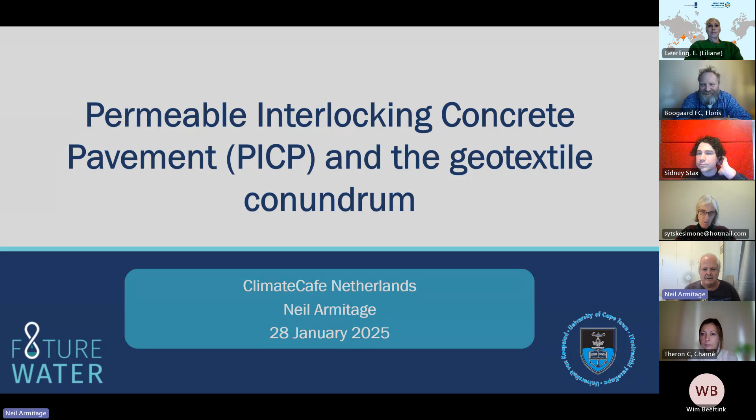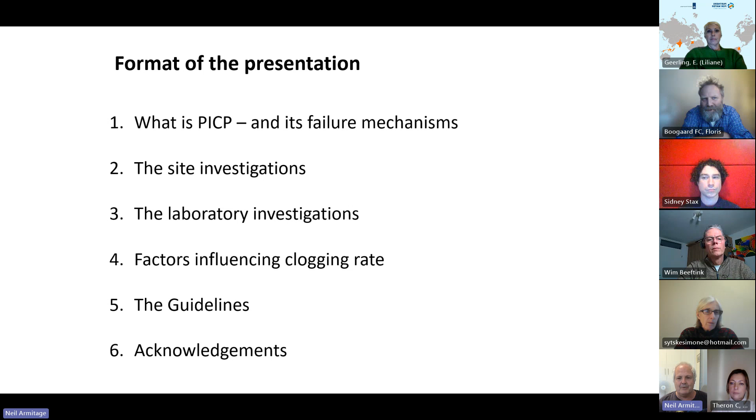So the format of the presentation: I'm going to chat very briefly about PICP and its failure mechanisms - you probably all know this already, so I probably don't need to dwell on it a lot. But what I want to talk about is some of the site investigations and laboratory investigations we did to try to address the big problem we have in South Africa as to why PICP is not working. I regard it as something of an embarrassing failure, something that is threatening to drag down sustainable drainage systems in general. In the end, I decided that if I couldn't stop it, I better figure out how to do it better. So I'll talk about what we found out in terms of the clogging rate - PICP fails by blockage. Then right at the end, I'll talk about the guidelines we put together, which are freely available from a link that I'm sure will be provided to you.

Maybe Neil, do you want questions afterward, or can people break in? What do you prefer? Given the size, given the fact that it's a very small group, I'm quite happy for you to chip in and ask questions as we go along - it's not such a big deal whether I finish all in one go.

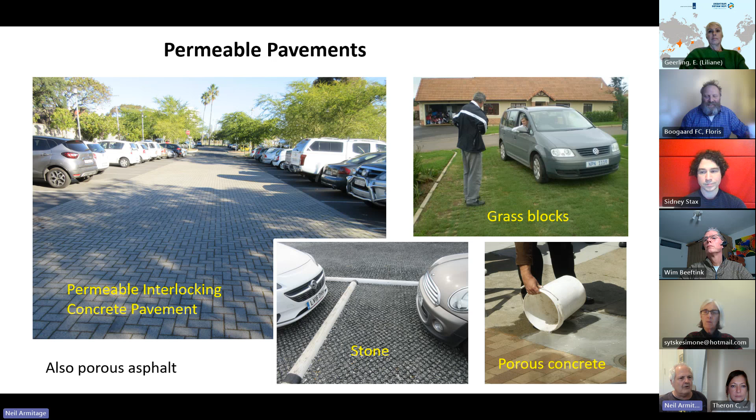So anyway, this is an introductory slide. Permeable pavements, as you know, come in many shapes and sizes. You get some very nice stone pavements like the bottom one, which is actually from the UK. Porous concrete - that was actually in San Francisco, in fact, a while back. Grass blocks, and then the permeable interlocking concrete pavement on the left-hand side. Just in passing, that was pretty much the view out of my office window when it was completed. Of course, I don't have that office anymore because I'm not head of department anymore, and I only go onto campus when I need to. But that was what it looked like shortly after it was completed, a fairly typical permeable interlocking concrete.

I'm not sure if it's in this presentation, but I know Ryan Winston from the US has a wonderful picture of a fire engine splashing water on permeable pavement, brand new. And the moral of the story is that you shouldn't ever be able to pond it.

It should always just disappear. And along the way, it does quite a reasonable job of taking out a lot of the solids in the stormwater. It does a less good job about taking out things like nutrients, although another study that I did, and if you want to hear that, I'm happy to come back.

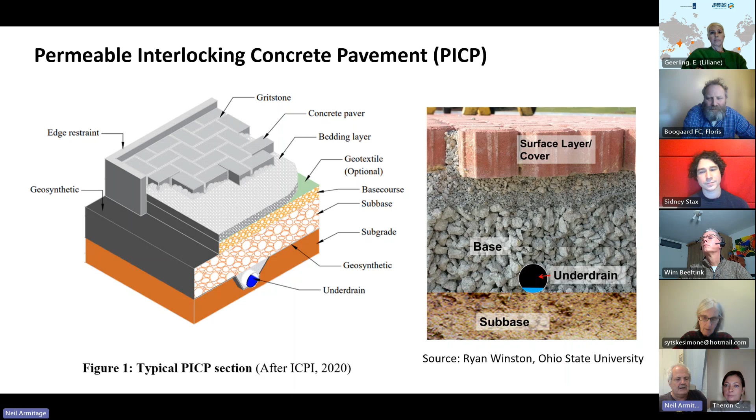So mostly it sieves out the solids, and the solids, of course, contain a lot of heavy metals and even some nutrients as well. And its main role actually is to reduce immediate runoff and either feed the groundwater or trickle feed back into the stormwater system. And pavers come in many shapes and sizes.

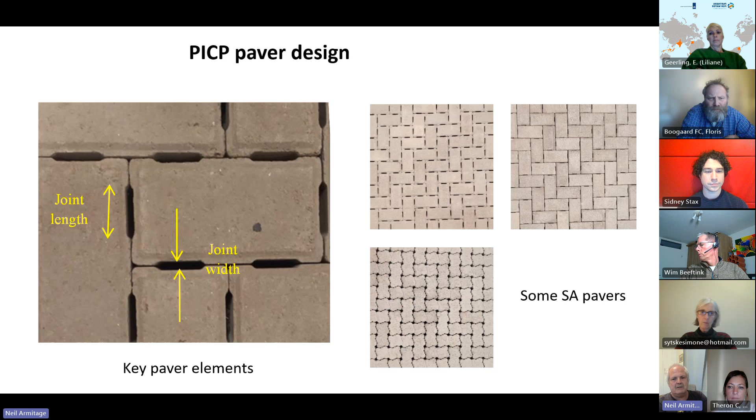And in our later research, we worked quite a lot with opening area as a way of understanding performance. In other words, do larger openings make for better performance, essentially?

So it was quite annoying. They put this thing down, and the next thing they did is they came along with a whole lot of marquees and hammered nails into the brand new bricks, which goes to show that, well, some people don't care. So that's been around for a while.

And here is some more under construction. This is in Joburg, in Johannesburg. You can see the different pavers there. And here's another one, back in Cape Town, showing some rudimentary maintenance. I'm going to talk a little bit about maintenance as well.

But let's move on. So the problem comes right here. I've been trying to promote sustainable drainage systems in South Africa since about 2007, 2008 or so. I got funding from the Water Research Commission to basically write guidelines for an alternative way of doing stormwater.

That would be more environmentally friendly. I had lots of friends around the world who were into this in a big way, so I could lean on them. And we produced guidelines, but PICP was one of 12 different main approaches identified by actually one of my students. He used to call them the 12 apostles. And PICP, or permeable pavements, was one of them.

And at the time, I thought, yeah, well, that's nice, but it would be totally useless in South Africa. You can see how it would fail very quickly. Maybe just to mention why that is the case. And that is simply because if you've been to South Africa, particularly at this time of the year.

Today was over 30 degrees. It was as dry as a bone. We've had a howling gale going for the last couple of days. It's hot, dry, dusty, and throw in poorer construction, no maintenance. You can understand why PICP would fail in droves, and it does.

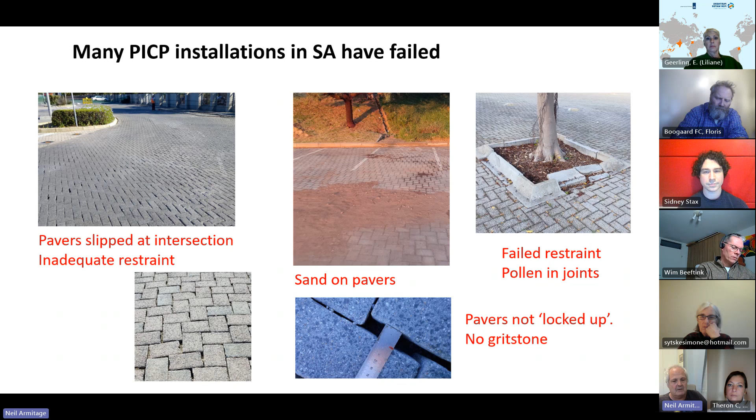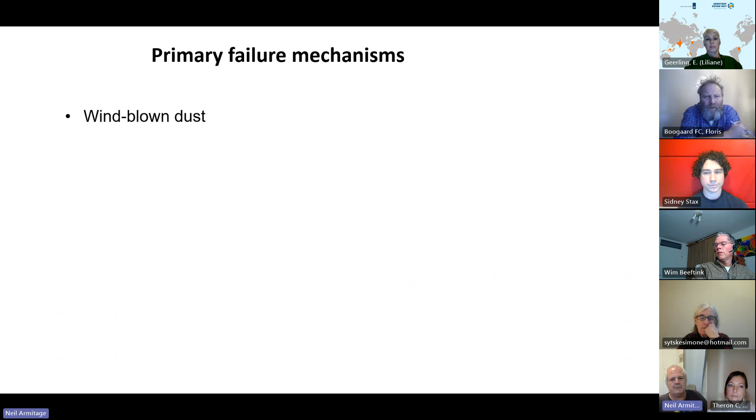So what were the primary failure mechanisms that we identified? Well, most of them are obvious - I would have thought every engineer would have thought of this without even a blink. It was the wind-blown dust, the high run-on.

Some of these sites connect large areas to them, making sure that all the sand and muck from the surrounding areas - and South Africa can get very mucky, let me tell you - we have informal settlements, we have poor refuse collection, we have everything.

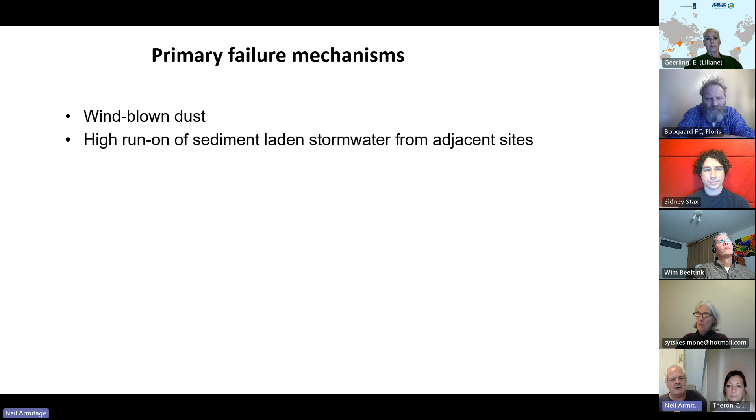High run-on of sediment-laden stormwater, poor construction practices - the joint filling material is supposed to be a 2 to 3 millimeter grit, but some people were putting builder's sand in here and wondering why the thing had failed on day one.

There were dirty aggregates - in some places they had put stone in there when it's supposed to be a single size aggregate. They had put aggregate, but it was like a concrete mix - it had everything in it, there was no single sizing at all, there was dirt in it, inadequate edge restraints, et al.

Differential settlement was something we saw on many occasions, and you see that when the whole surface starts to wave because of vehicle loadings.

Unsuitable environmental conditions - these things were put under trees or next to planters. One very common issue in South Africa is that its climate is very similar to Australia's, so Australian vegetation grows very well there - in fact, Australian vegetation grows better in South Africa than South African vegetation, and the reason for that is quite simple: the natural controls have been removed.

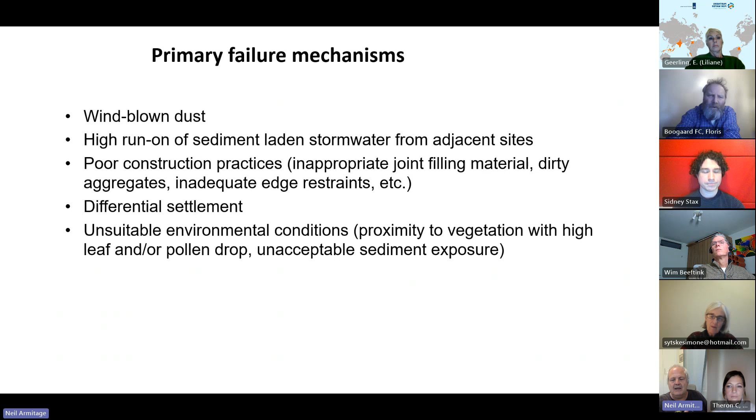It works in reverse too - South African vegetation grows better in Australia than Australian vegetation, because the natural controls have been removed. So we have these big eucalypt trees, they grow massive, 20, 30 meters high, dropping fine pollen onto the pavers and plugging the gaps.

Lack of maintenance - well, very few sites are maintained at all. When we did our survey, there was zero maintenance in Johannesburg - it might have changed now, but I wouldn't hold my breath. In Cape Town, we knew of only one site really that was being maintained regularly and was actually making out okay because of it.

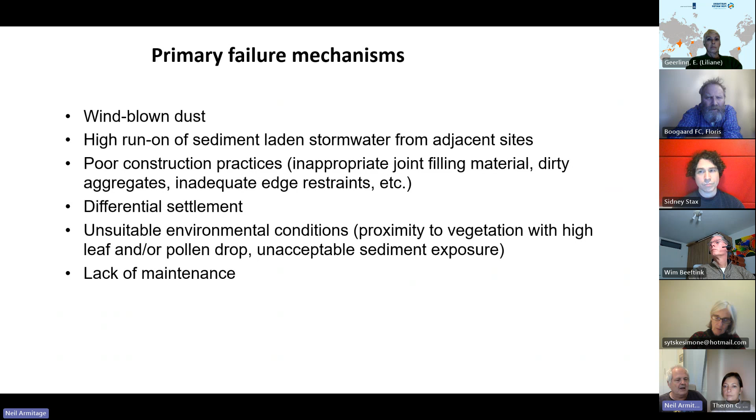Part is because of a culture of lack of maintenance, part is because we don't have the equipment. I went to the US on an interesting tour, spent time with Bill Hunt at NC State, and then at the LID Operations and Maintenance Conference where they had demos of fancy machinery for PICP maintenance. Of course we're not going to get that in a country like South Africa, you're going to have to look to something else. So I get it's difficult, but it's not impossible.

One concludes that in South Africa, at any rate, although it was interesting chatting to people around the world doing PICP research, there's a lot of disagreement but essentially poor understanding of PICP design, construction, and maintenance. We needed to do better. My tactic in the end was to get funding to do a proper investigation and come up not only with a report of why things were failing, but guidelines to stop the rot, to try and guide consultants and municipal managers and contractors to do a better job.

Maybe one question, Neil, because you talk about maintenance. Was there only one site, or several sites in Cape Town? You don't have the machinery - what do you mean with maintenance? What kind of maintenance did they do? Was that sweeping, or was it more?

What action? There's many ways you can do maintenance, but sweeping, if you're not careful, actually makes matters worse because you simply sweep dust into the cracks. In theory, vacuuming the stuff out of the cracks should work, but it doesn't, for various reasons. I've seen American equipment that claims to do it, but I've seen research that says it doesn't do a particularly good job.

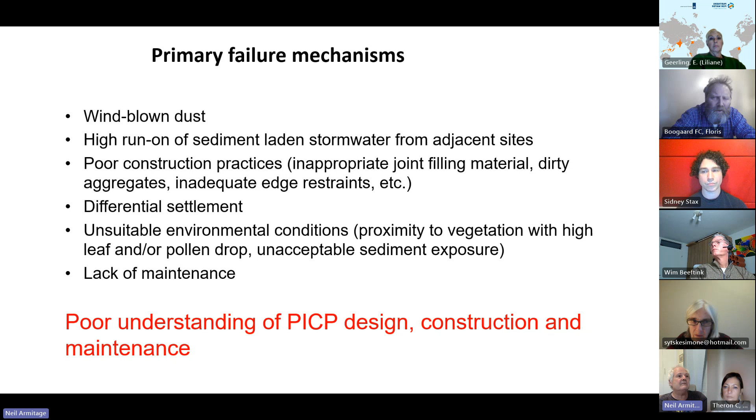Maybe I can go back to that very quickly. Let me see - oh no, there it is. That one. So you can see this is the one site that is being maintained and holding up quite well. It's just down the road from me, a shopping center. And what you can see there is a chap blowing compressed air into the gaps.

Now, of course, South Africa has a massive unemployment issue, between 30 and 40% unemployment, which means people will work for unbelievably low wages, something that would be regarded as slavery in the Netherlands. Nevertheless, it's a job for people. So this maintenance crew was put together from unemployed young adults in Cape Town, and essentially it's a compressor with a wand directing a jet of air between the joints, going around each and every brick individually. It's impressive stuff from the perspective of a rich country - that's why the Americans have fancy machinery, but we have people.

So we do that, and you can see from that slide, he blows the crud out of the top 25 millimeters onto the surface - you can see it just beyond him. Then someone comes and sweeps it up, hopefully not too much of it falls back in the gap. They do that on a 3-yearly cycle.

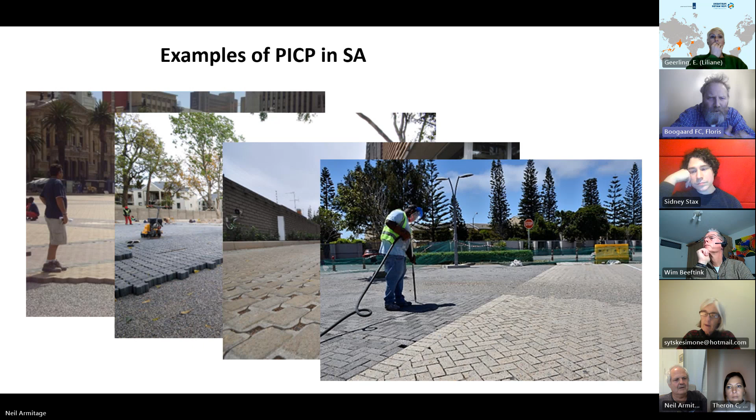But yeah, we haven't got there on this particular site. We will shortly. No, it's good to be clear what kind of maintenance - we know because you didn't have the equipment, but yeah, this is clear, blowing with wind, with air, perfect. The other things, we just don't have the equipment, but fortunately we've got people.

So the research culmination was these two years that went into producing this report on clogging failure in South Africa, plus the guidelines.

We did extensive literature review, as we always do, of course. We collected data from 11 existing sites, and I'll show you a bit about that. I had a brilliant student who was in charge of this, and he did things that most normal people would not contemplate in their worst nightmares.

Laboratory investigations we did as well, to try and get a feeling, in a controlled environment, what's going on. And then this working group - I basically threw it open to anyone in South Africa who had an opinion or wanted to have an opinion.

So I got municipal engineers, I got consultants, I got suppliers, both of the pavers - we couldn't get the stone in the end, but other people spoke up for them. Everybody who said, I'm an expert in this, or I want to be an expert in this.

I said, come and join. As you can note from the dates, it was during COVID, and it turned out to be a brilliant thing to do in COVID, because we were all sitting on Zoom anyway. So we could do it from wherever we were - it was across the country.

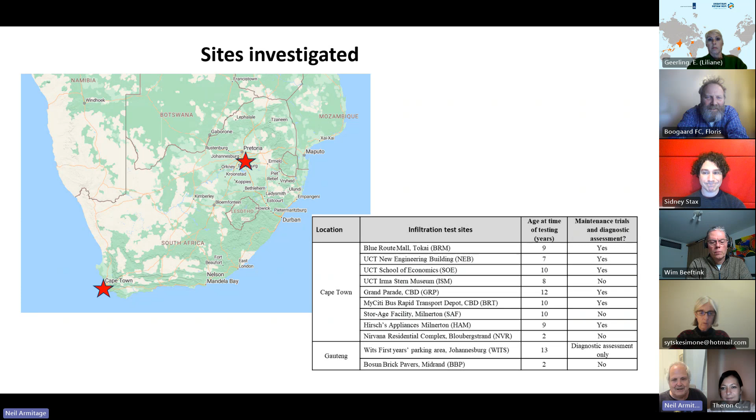And you'll see the maintenance trial and diagnostic assessment. What we particularly wanted was diagnostic assessment, because that means digging it up. And of course, not too many owners of PICP were happy for us to go and dig up their paving. 'Shopping centre, let's just dig up the middle of your shopping centre - you don't mind, do you?' 'No, of course, go ahead.'

All right, so how do we test it? We used a modified ASTM single ring infiltrometer. On the left-hand side is how you see it in the textbooks - we had one of those. It was really awful, because trying to get that putty in doesn't do a particularly good job, and you can't get the markings off. So I decided, no, we're going to reinvent this.

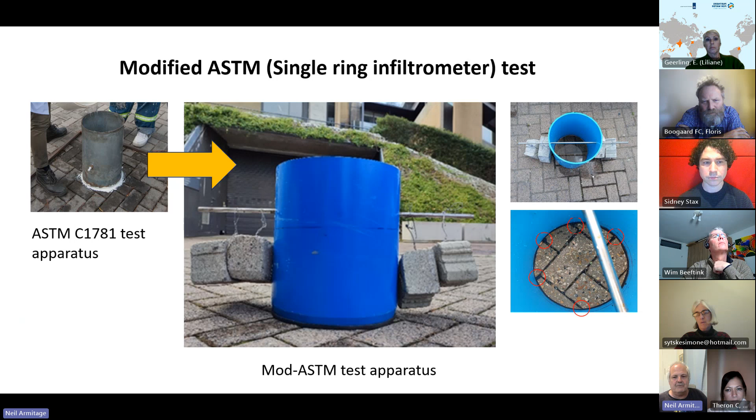So we got a 315 UPVC pipe, we chopped a length off it, we put a neoprene pad at the bottom and a couple of weights to hold it down, and tried to plug the corners as best we could with some neoprene strips. And we did a lot of tests - we've been doing the test for some years now to try and get some sort of calibration.

And we measured the infiltration rate, but we also did a modified Swift test. This was developed in Australia and is a quick and easy way of determining how blocked your PICP is, by basically looking at the area wetted when you drop 6 liters on it.

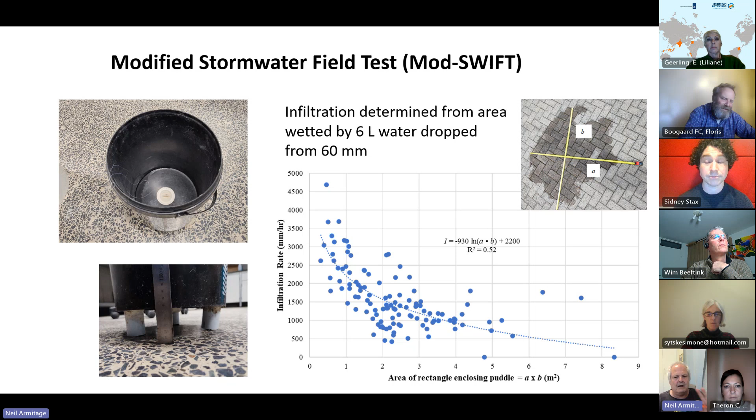But I'm not going to talk about that much, other than to say that we did this as well. So what I want to really do is show you what we were doing now.

This site on the top left-hand side is actually the Grand Parade in Cape Town. It's the oldest site in Cape Town, completed in 2009, just ahead of the World Cup. You can see the test spots; we looked at various spots trying to find a range.

On the left, the green was used extensively for what they call hawkers' stalls. Poor people set up their tables and sell cooked chickens and chips and things, very greasy stuff. In other words, grease, not very friendly to PICP.

And then there were other areas that were different. You can see the kind of results we were getting on the left-hand side. This is the surface infiltration rates.

You can actually see, to all intents and purposes, they were all blocked. Now don't be misled, just because it says it's 30 millimeters per hour doesn't mean it's really 30 millimeters per hour, because it's almost impossible to stop leakage out the side. In fact, once you get below about 250 millimeters per hour, you're really in clogged territory. So this is clogged - you can see that's all clogged, not working.

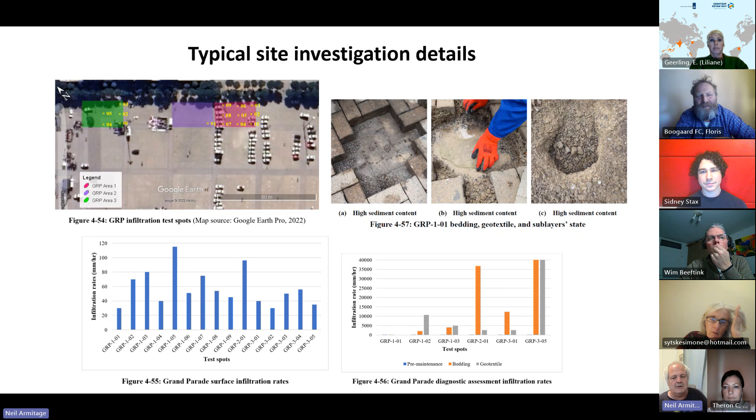Anyway, we did lots of these tests all over South Africa - surface tests, down onto the geotextile underneath, on the bedding layer, under the bedding layer, through the bedding layer, all the way down. We found there are 4 quite clearly defined failure mechanisms, or maybe 3, because type 3 requires you to have a geotextile. If you have a geotextile, there are 4 quite clearly defined failure mechanisms.

There's the muck in the gap. There's the muck at the bottom of the joints. There's a textile failure because of the mud being ground into it. And then, very rarely, there's total failure of the aggregate.

Of course, if you don't have a geotextile, then in theory you can eventually get like that over a long period of time. But I don't think it would happen - it'd have to be a very long period of time, I imagine, to get like that. So that's really a construction failure.

So I define these as type 1, type 2, type 3, and type 4, because it helps you understand what the mechanisms are and therefore what you need to do about it.

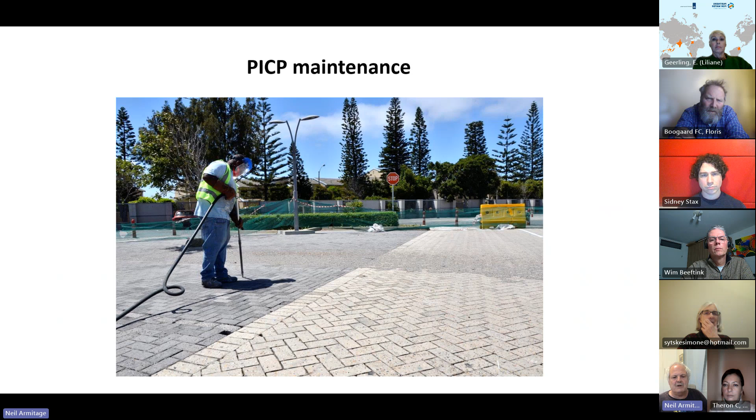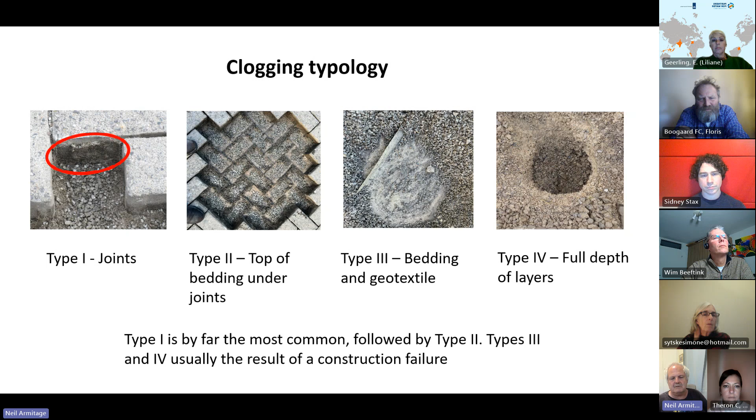And then we talked about the maintenance, and the maintenance is really designed to clean up type 1. It does so partially, but at the expense of moving some of the material into ultimately a type 2 failure. And when you get that type 2 failure, or even type 3, you eventually get to a point where the only way out is to lift the bricks, peel off the bedding stone with its geotextile, and then put in fresh material. This is reconstruction - type 4 is reconstruction all the way through.

So maintenance, that's what's happening on site. But meantime, we've got parallel investigations in the laboratory, 4 PICP test cells to look at, and we had a whole lot of questions.

It was about the geotextiles. Ryan says never use geotextiles. Sue says always use geotextiles. The Australians couldn't make up their mind, eventually settled on never use geotextiles. So what is the link between different types of geotextiles and clogging? Sue is saying you must use Fibertex. The locals are saying it's too expensive. Can we use an alternative? Why can't we just use a non-woven needle punch cheap stuff? Won't it do the same job? No one knows. Okay, so let's try.

The link between paver opening and clogging, because different designs have different paver openings, using the same geotextile, changing one thing at a time. The link between different geotextiles and clogging without the pavers installed. Maybe it's not about the pavers.

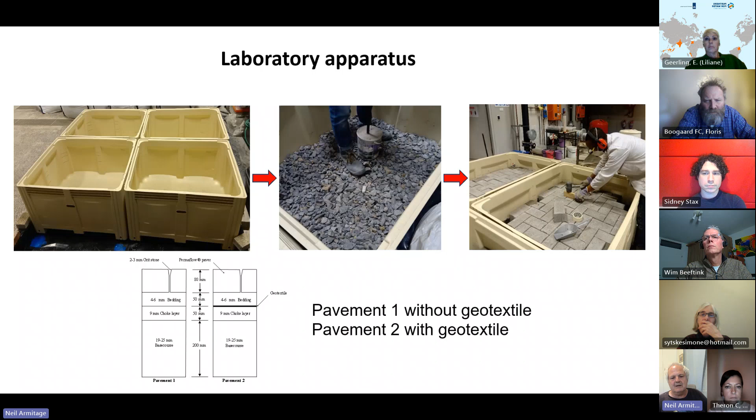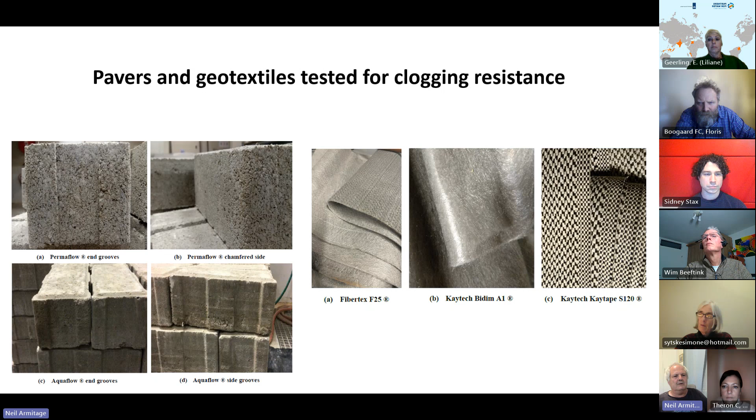Here's our experimental apparatus. You can see these bins, these jumbo bins. We had some holes drilled in the bottom, and we constructed typical PICP sections in them, with and without geotextiles. You can see we try to replicate in the laboratory what we had in the field. Then we looked at different types of paving design and three different types of geotextiles to represent woven, punched, non-woven, heat sealed non-woven, needle punched, and woven, basically. We tried lots of combinations.

Because of the size, we looked deliberately. In fact, we took from site initially sediment that we took from the maintenance - they cleaned out a site. This is the stuff that clogged, right? So I'm not going to worry about the stuff that doesn't clog, this is the stuff that clogged. We put it through some sieves, sprinkled it all over as best as we could, and then we applied rainfall measured with a watering can, no fancy watering device. This is far more accurate, and you know what? I'm convinced it does a better job.

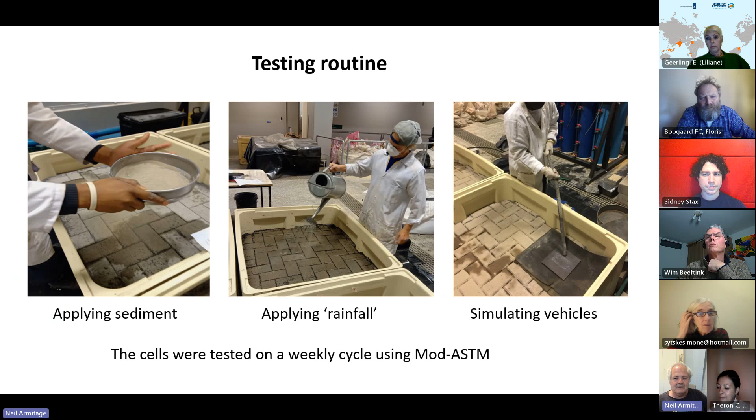And we even tried to simulate vehicles. That was a bit awkward because obviously we can't get a rolling vehicle on this. Sue did offer their very sophisticated full-scale dynamic test platform in the UK - I hesitate at what expense, but anyway, we didn't take her up.

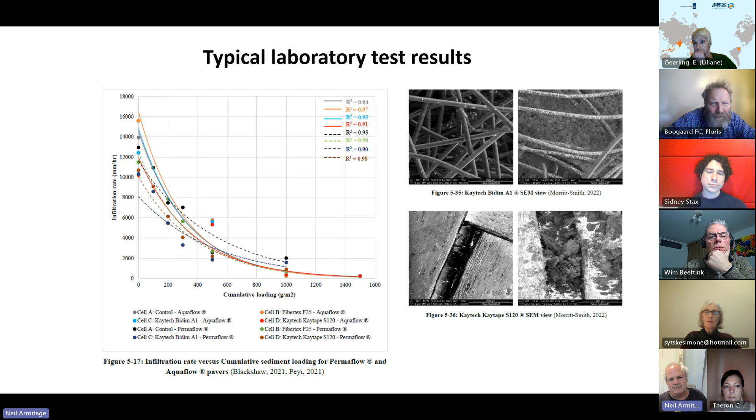That's a question to us, right? As scientists, what do you think? Well, the lines go down, but lines will go down. And they go down in some sort of curve, yes. And where do they end up? Zero, almost zero, all at the same point. You can see that actually it doesn't seem to matter, all the different combinations. Yes, you can start off with much higher flow rates - over 16,000 millimeters per hour, if you can actually measure that, down to 8,000 millimeters per hour. These are all brand new, just completed, constructed, whatever. They all decay at slightly different rates, but it isn't long before they're pretty much all converged.

So what we did find - what are the factors ultimately affecting clogging rate? This is a combination now of laboratory and site, loads of experiments on site, loads in the laboratory, loads of pondering. Obviously age of pavement is an issue, but it has links to environment, installation, and maintenance. What we found, which rather surprised us and we got a lot of blowback from this, age doesn't correlate particularly well with blockage. A well-designed, well-maintained pavement can last decades. A poorly maintained, poorly designed pavement can fail in minutes. Age is not a particularly good predictor of clogging.

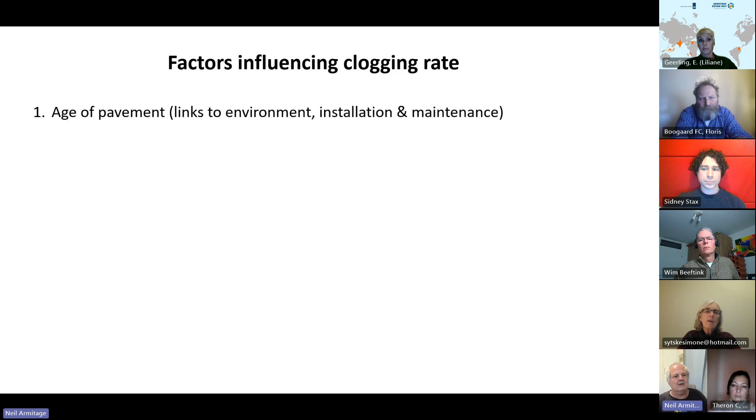Run-on factor - now this was a big thing around Winston. He's got a paper on this, and he spent a lot of time going around the world saying how the bigger the run-on factor, the faster you fail because it brings muck onto your pavement. Does it make a difference? Yeah, I guess so, but you know what? It isn't a big correlation either. So think about it, but don't lose too much sleep. Pavement type - well, the larger joints do better, and they do better simply because they can store more muck until they clog. That's why they do better. It's not rocket science we're talking about here.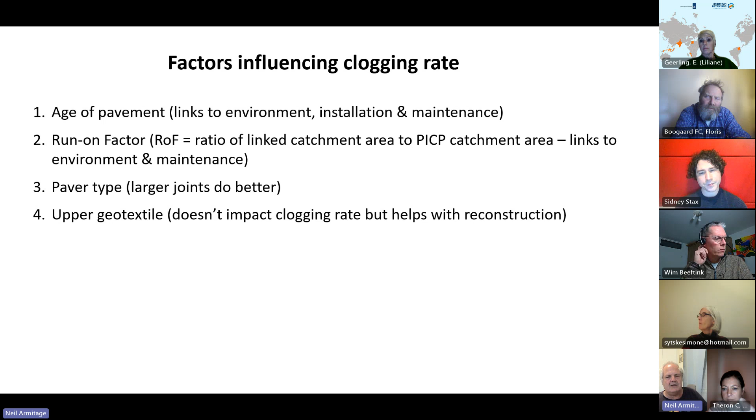Now we come into the zone, that upper geotextile under the paving layer. Americans are adamant it's a bad thing. What we discovered, and I think we did it fairly thoroughly, is that actually it's not a problem - because the clogging happens generally higher up. So it's not in the geotextile, it's in the joints, or it's on the bedding layer. And when we saw a geotextile failure, it was always associated with movement of the bricks over the bedding. If you let your pavers slide, like at that turning circle, you are going to have a geotextile failure. But it is not because the geotextile is inherently a bad thing - it's because you haven't constructed the thing properly.

Every time where we had well-constructed pavements, well-restrained, no sensible movement, there was never any clogging of the geotextile. Never. And it doesn't really matter what geotextile you use either.

Now, in the UK, they like using Inbitex because it's got a breakthrough head of about 50 millimeters, and they're trying to create this anaerobic zone and trying to get nutrient removal. Look, we did a lot of work on this. Good luck to them. In South Africa, it's not the place to do this kind of stuff. Just put the cheapest, robust Bidim, we call it, or Kaytech, in there. It'll do the job just as well. In fact, a non-woven needle punched has got more resilience than the rest and is likely to last longer.

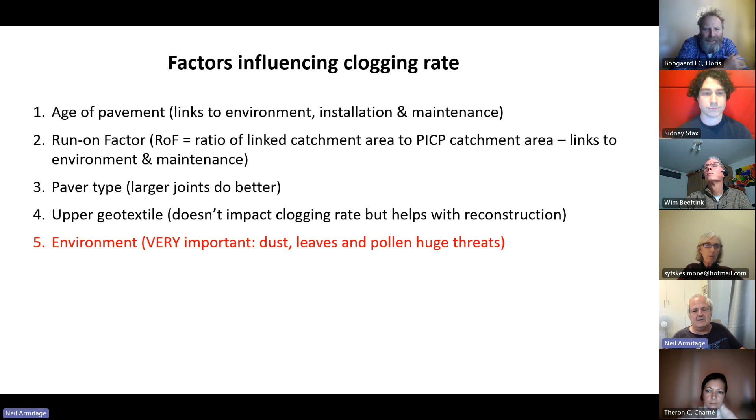So which are the big issues? Here are the red letter items, the ones that you must get right. First is your environment. You've got to, as far as you can reasonably do so, reduce the dust, leaf, and pollen threat. However you do it, you put a filter strip, or you don't put trees anywhere near your pavers, whatever it takes. You're lucky in the Netherlands because you've got a damp climate, so you don't get a lot of dust. But if you're in South Africa, where we get loads of dust, this is major. You've got to get your environment right.

The next red letter item is the design and construction, isn't it? If you don't design and build the thing properly, it's destined to fail. I mean, that's obvious. This PICP laid flat, it's quite interesting. I had a phone call from a former classmate of mine, other part of the country, saying there's this major, big, expensive PICP's just failed. The whole thing, why?

This thing was laid on about a 5-degree slope, a big, long PICP, a 5-degree slope. So, okay, this is not rocket science. Water goes into the bedding layer, runs along the top of the subgrade until what happens? It gets to the bottom, pops up, and in true stormwater fashion, pops out all the bricks. A multi-million rand, million euro catastrophe, because the designer didn't understand that PICP should be laid as flat as possible.

There are ways of tolerating small slopes and all the rest of it, but do yourself a favor, lay it flat. Ensuring robust edge restraints, that was very common - edge restraints kicking out, and then the bricks start to march away from each other. And then don't use in high traffic intersections.

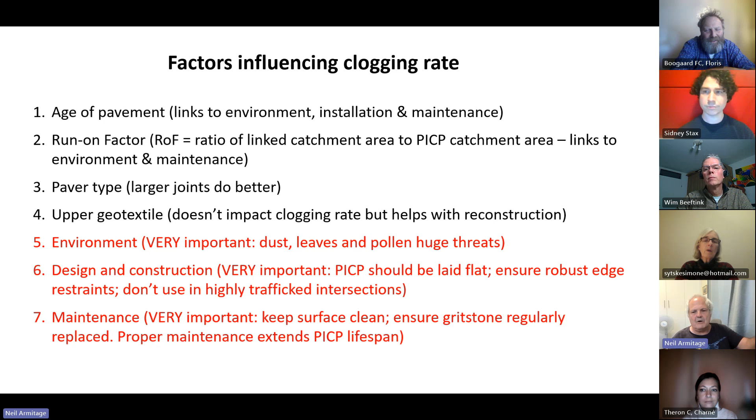So we started off thinking that 1, 2, and certainly 4 were going to be major players, and actually no correlation. They were outweighed by 5, 6, and 7. Completely outweighed. If you can't get 5, 6, and 7, don't even worry about the rest. So that's what we found. And I might as well finish up and then we can have a bit of a chat.

So it went into 2 Water Research Commission documents, freely downloadable. There's the URL. I'm happy to send you the PDF and you can download it to your liking. The first one is about clogging and permeable interlocking concrete pavement. So you can look at the data, all the stuff we did, the data we collected, all the curves, all the stuff. Do what you like.

It's kind of the thing that you give to your PhD student. I think it's quite well written, but then I'm biased. Most people won't read it. And then the guidelines, which I try to get down to just, I think it's 15 kind of spaced pages, lots of pictures and diagrams. I was tempted to call it - I was going to put 'PICP Design for Dummies' - but I decided against it. I think this is a better title.

PICP is not difficult to design and construct. Of course, the devil is in the details. You've got to get the details right.

I lean very heavily on the ASCE guidelines for PICP. There are only 2 that I know of, the American one and the British one, and the American one is streets better than the British one, even though the Americans unfortunately have yet to join the 21st century with their units. But they are busy updating it, that's going to come out soon. And by the way, Ryan Winston is the deputy chair of the committee that's updating the ASCE.